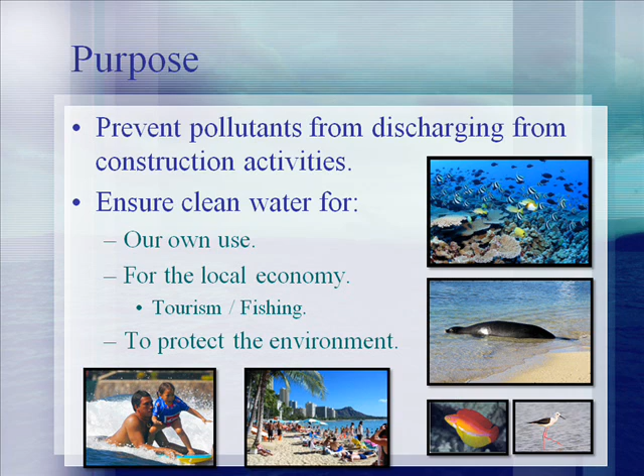All personnel involved in the construction process are expected to comply with the DOTA Environmental Construction Program. This includes the DOTA division and district engineers, as well as tenants who may initiate construction projects at the airport. Design consultants must be aware of the environmental requirements and incorporate the appropriate best management practices, or BMPs, into their design. Construction managers will ensure that BMPs are properly implemented at construction sites. Contractors will follow the BMP plans and ensure that their workers are trained in maintaining the site-specific BMPs.

Another requirement of the DOTA construction program is that every individual working at the airport must be aware of the DOTA environmental policy as put out by the Director of Transportation. The policy includes the acronym COP, in which the C stands for Continual Improvement, the O stands for Obey All Laws, and the P stands for Prevent Pollution. The full policy is available on the DOTA website. Remember that the DOTA would like for everyone to be a COP.

Stormwater runoff can carry pollutants from construction sites to adjacent storm drains or waterways. Once stormwater has entered the storm drain system, it is directed through pipes to the receiving water without any treatment. Therefore, it is vital to control potential sources of pollutants before they are impacted by stormwater runoff and possibly discharged to the storm drainage system.

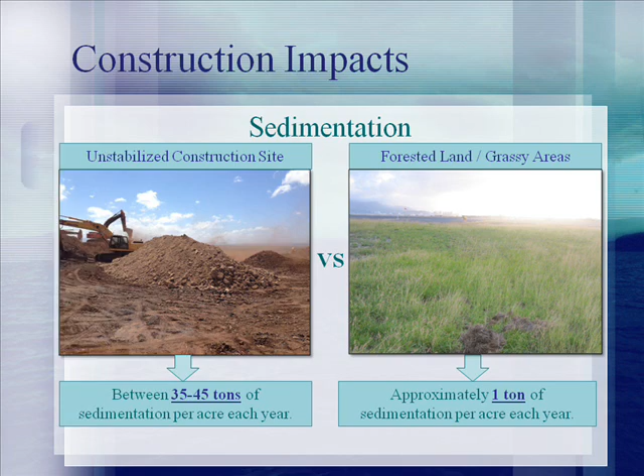Construction projects may have both short-term and long-term impacts on the environment. Specifically, construction sites usually result in the installation of increased impervious areas, such as paved parking lots, roads, and buildings. The more impervious areas there are, the less the stormwater can infiltrate into the ground. With decreased infiltration, there will be an increase in stormwater runoff and with it a higher potential for pollutants to be discharged into the storm drain system.

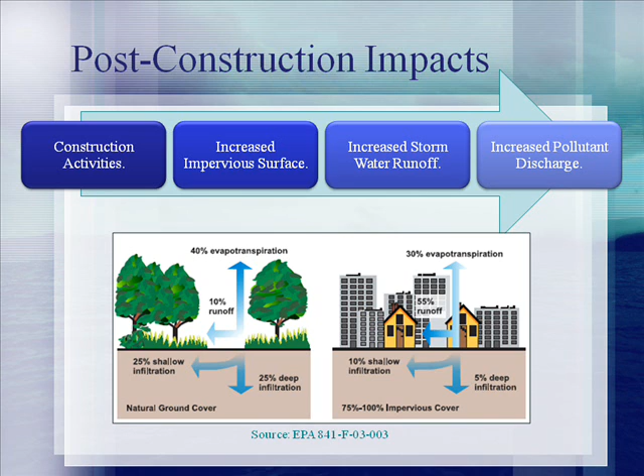Therefore, in order to mitigate this impact, the DOTA requires that construction projects also include permanent BMPs that will remain on site following construction to treat the stormwater runoff on a long-term basis.

There are several specific environmental regulations that govern construction activities. The DOTA has detailed specific requirements for construction sites on airport property within the SWMP Section C and D, which can be found online at the website shown. Additionally, the State of Hawaii Department of Health, or DOH, requires that National Pollutant Discharge Elimination System, or NPDES, permits be acquired in several circumstances. These circumstances may include any land disturbance over 1 acre, when dewatering must occur on site, or during hydrotesting.

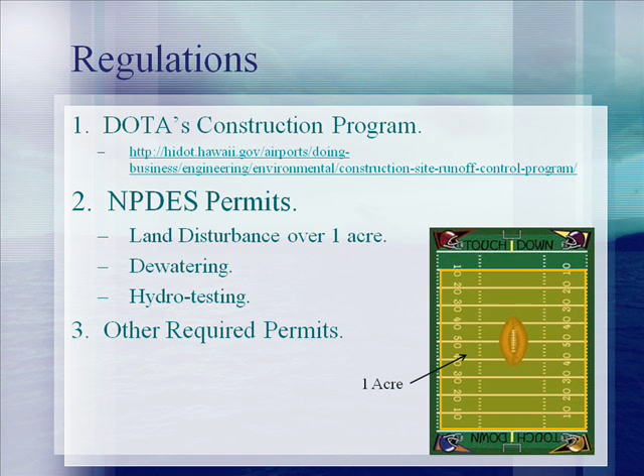Depending on the type of construction activity, there may be additional required permits. Specifically, if there must be a discharge or a new connection to the DOTA storm drain system, then a DOTA discharge permit must be obtained. Other permits may include the Army Corps of Engineers permits, the DOH 401 Water Quality Certification, County Special Management Area permits, and/or Federal Aviation Administration regulations.

The DOTA defines construction as any activity that disturbs land, which includes the penetration, turning, or moving of soil, or the resurfacing of pavement with exposure of the base course. This may include construction roads, staging areas, stockpiles, grading, grubbing, and demolition. If you are uncertain whether your activity meets the DOTA definition of construction, please assume that it does and submit your construction plans to the DOTA Environmental section for review. Their contact information is available at the end of this presentation.

The DOTA categorizes construction projects by project management. Some projects are planned and financed by the Department of Transportation, and other projects are initiated by tenants on airport property.

The type of project management used will help identify how to best provide environmental oversight. Projects may further be grouped by size, since projects that disturb an area greater than 1 acre have increased requirements for permitting. However, the DOTA must provide oversight for all projects, even if they are less than 1 acre.

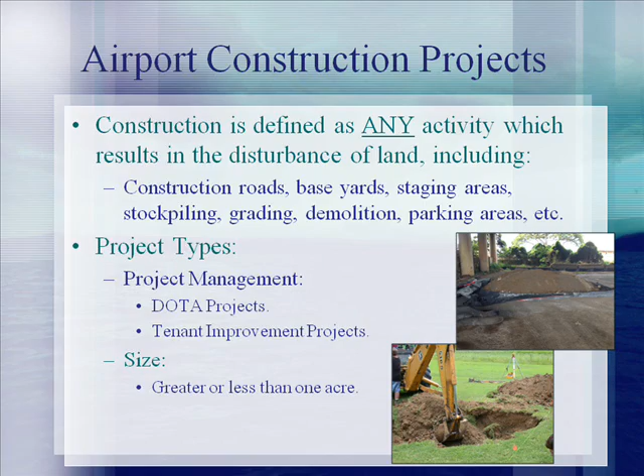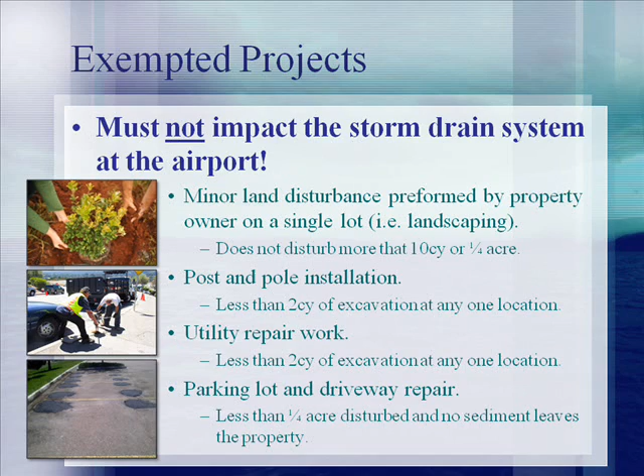The DOTA has evaluated some of the projects that occur at the airport and determined that the environmental impacts of certain types of projects are negligible and therefore may be exempted from the DOTA program. These projects must not impact the storm drain system in order to be considered exempted. Exempted projects include land disturbance on a single lot less than 1/4 of an acre, post or pole installation, utility repair work, and parking lot repairs.

Other projects that must comply with the DOTA process for environmental oversight are described in the Stormwater Management Program Plan, or SWMP, Sections C and D, which can be found online. A link will be provided on the last slide of this presentation.

BMPs must be implemented at construction sites. BMPs can include practices or procedures such as cleaning up a spill or picking up trash. BMPs can also include devices used to control pollutants, such as berms around the storm drains and stockpiles, secondary containment for chemical storage, and silt fence.

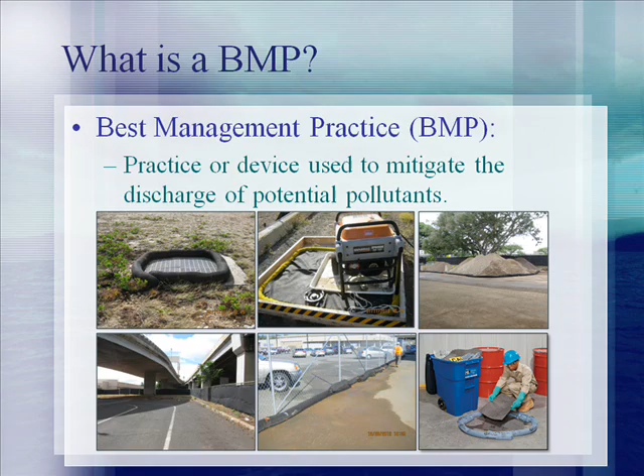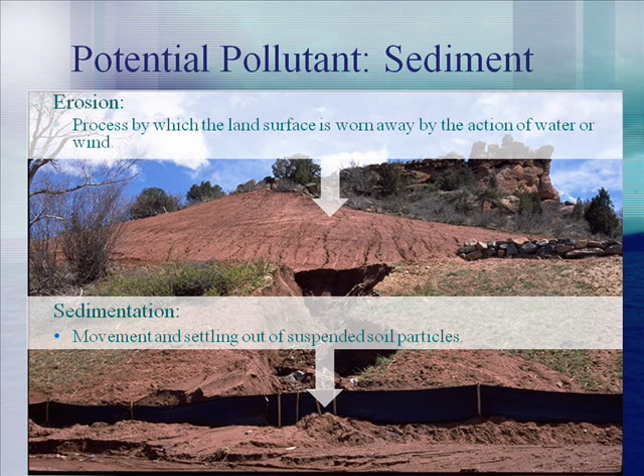The discharge of sediment is a common concern at construction sites. Therefore, the DOTA has included BMPs in the Stormwater Management Program Plan, found on the DOTA website, that address both erosion and sedimentation. Erosion results from the displacement of soil particles due to wind or water runoff. If erosion can be controlled on a construction site, then sedimentation, which is the movement and settling out of suspended soil particles off-site, will not be a concern.

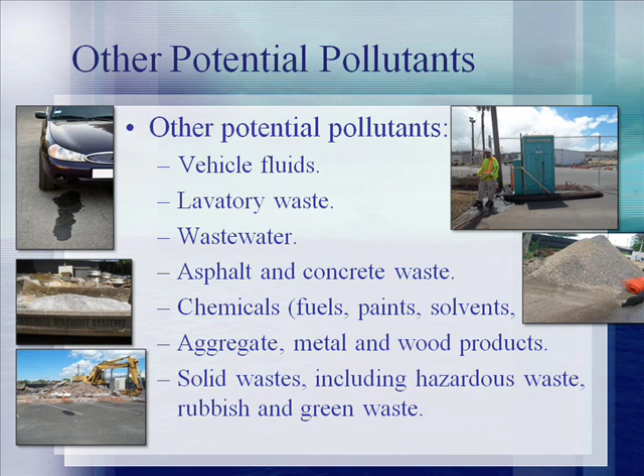Sediment is not the only potential pollutant from construction activities. Other common pollutants may include leaking vehicle fluids or spills from fueling activities, lavatory waste from portable restrooms, wastewater and concrete waste, or storage of chemicals on site such as paints and solvents. Further, aggregate stockpiles often include fine materials that can be carried away in stormwater runoff. Another concern is the generation of wastes, which need to be properly contained while on site and then disposed of.

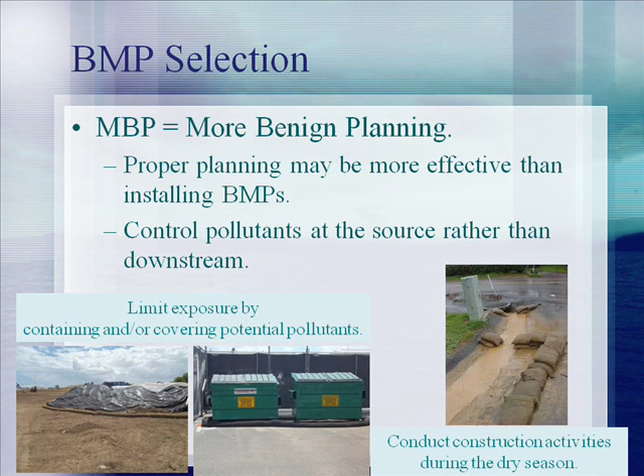When selecting BMPs, first begin with planning. Proper planning of a construction activity can often mitigate the pollutants that are generated. Project managers should consider the construction schedule, attempt to conduct ground disturbing activities during the dry season, or phase construction so that segments of the site may be stabilized prior to disturbing the next segment. Additionally, project managers should attempt to isolate potential pollutants by placing them indoors, covering, or otherwise containing them. Attempts should be made to control pollutants at their source, since removing pollutants downstream is much more difficult.

For the next step in this process, the designer should identify potential pollutants that may be generated at the site from start to finish. This may include looking at proper management of demolition wastes, controlling erosion during ground disturbance, the management of concrete waste from pouring the foundation, proper cleaning of painting equipment, and the use of pesticides or herbicides on installed landscaping.

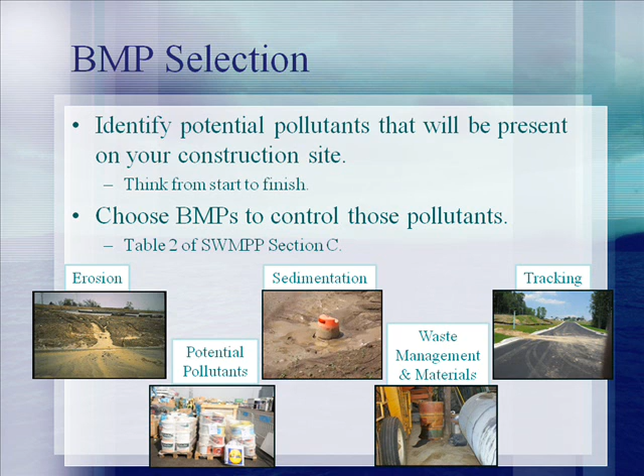Appendix A lists various BMPs that may be applied to the construction site. These have been divided into several categories: erosion control, sediment control, tracking control, other potential pollutants, and waste management. These BMPs are included as a framework. However, designers and contractors may implement other BMPs not listed here with approval from the DOTA Environmental section.

Every construction project on the airport must implement some type of BMP in order to control potential pollutants generated by the activity. These BMPs must be documented in a site plan that includes a site map. Note that BMPs may be updated at any time during construction as long as the changes are noted in the plans and initialed by the contractor.

The selected BMPs must be installed prior to any construction work on the site, including demolition. Once installed, the BMPs must be maintained throughout the course of the work until the soil has been stabilized.

Also think about unique challenges that may be posed by your construction site and be creative. Overall, the DOTA wants to prevent pollutants from entering the state's receiving waters, and therefore the DOTA is open to any creative solutions that designers and contractors can devise.

Designers should consider all aspects of a project and consider alternatives to certain applications, such as refraining from the use of herbicides or fertilizers during the installation or removal of landscaping. BMPs for the application of those chemicals are described in more detail in the SWMPP Section E.

In general, applicators should ensure that they are not spraying near a surface water body or on a steep slope. The forecast should be consulted to determine whether rain is expected that day. The wind speed should be checked in an effort to ensure that spray will only be applied where it is intended. Also of importance is a requirement that applicators keep a log of their usage of these chemicals and report it to the DOTA Environmental Unit at the end of the year.

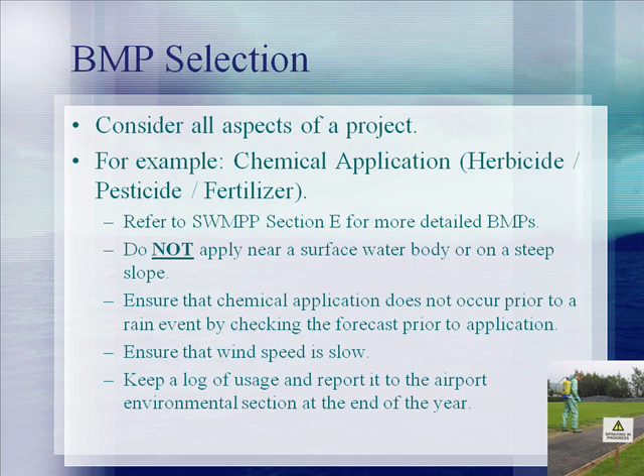In addition to BMPs that should be applied during construction, the DOTA requires the installation of permanent or post-construction BMPs. Permanent BMPs are vital because they will continue to address any potential pollutants long after a project has been constructed. For example, if a construction project is for a parking lot, consider adding a green parking BMP such as porous pavers or a central grassy swale to provide filtration for runoff in paved areas.

This will reduce the quantity of runoff and will also assist with reduced pollutant loads, such as oil drips from parked vehicles. Exemptions to the requirement for permanent or post-construction BMPs include sites disturbing less than 1 contiguous acre of land, linear utilities, and projects that will not discharge to any water of the United States. All other projects must select permanent BMPs and include them in the project design. The selected BMPs should be documented in the design review checklist.

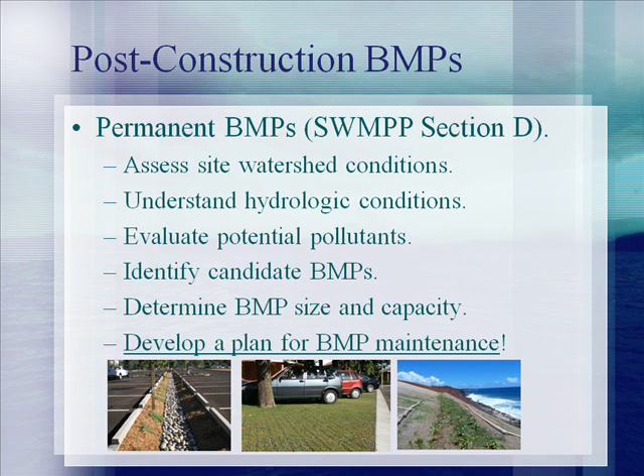Permanent BMPs are discussed in further detail within SWMPP Section D. Various factors should be considered when selecting a permanent BMP, including watershed and hydrologic conditions, as well as potential pollutants that may be generated. The designer should select a candidate BMP and size it appropriately to handle the runoff from the site. Most importantly, a plan for continued maintenance must be drafted, and in the case of tenant projects, a continued maintenance plan must be signed by the tenant owner.

A retrofit feasibility study was conducted for the Honolulu International Airport to evaluate completed areas of the airport and the potential to alter or insert a permanent BMP. The study includes a list of 10 hotspots to be addressed as soon as possible and 24 proposed retrofits that are ranked in order of priority. The study is available on the DOTA website.

An example of hotspots included in the report are the 2 triturators at Gate 6 and Gate 34. The triturators are locations where aircraft lavatory waste may be disposed into the sanitary sewer. The current design allows for the discharge of wastes to flow from the triturator to nearby storm drains if a discharge is not properly aligned over the pit. These illegal discharges have been noted by the Department of Health and Environmental Protection Agency on previous environmental audits. Therefore, retrofit options have been proposed to contain the triturators with perimeter curbing with a trench drain at the driveway opening, which would connect back to the triturator unit. Therefore, any spills in this area would be contained.

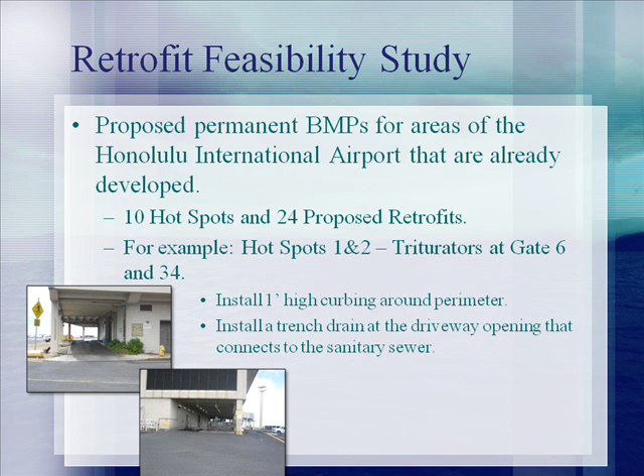Other hotspots and retrofits that were identified in the retrofit feasibility study should be evaluated when there is a new project at the airport. DOTA engineers may notify the environmental unit of this evaluation via email.

The DOTA has compiled a list of preferred permanent BMPs that should be implemented where possible for a project. The list is available on the DOTA website and focuses on 2 main goals. The first goal is to retain as much stormwater on a project site as possible. The second goal is to install a treatment system to remove pollutants from the stormwater that is discharged from a project site.

Many of the treatment BMPs are available through several different manufacturers. The maintenance section should be consulted prior to product selection so that continuing maintenance requirements can be met with standard equipment.

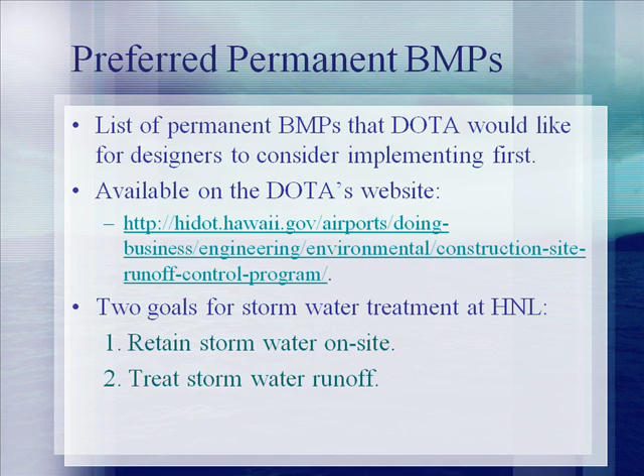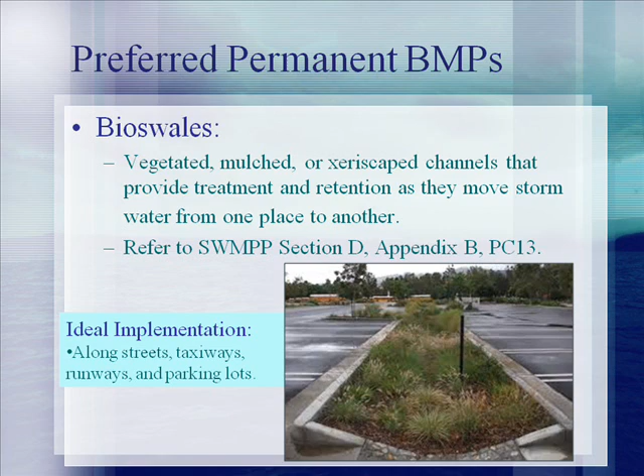Bioswales meet the objective of both retaining stormwater on-site and providing treatment. A bioswale consists of a channel where stormwater from a site would be directed and permitted to infiltrate into the ground, thereby reducing the quantity of stormwater discharge. Additionally, vegetation in these channels can be effective at removing quantities of pollutants that may be present in the discharge. Bioswales are ideally placed along streets, runways, taxiways, and parking lots where a significant amount of water needs to be drained from a paved area and can also support vegetation growth.

Underground detention systems are designed to drain an impervious surface area and direct it to underground compartments where the water is permitted to infiltrate and recharge the groundwater. This BMP is beneficial to use at the airport because it does not occupy space that may be needed for operational activities and also does not promote habitat for wildlife, such as birds, which are a safety concern for aircraft.

It is often a good idea to include a pre-treatment device with the underground detention system to remove trash and other large debris. Also, ensure that infiltration rates are examined in the potential construction areas to ensure that the BMP will be able to drain the expected runoff.

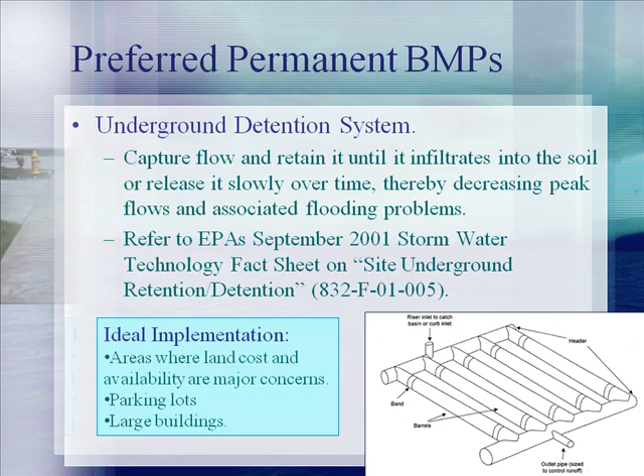Another BMP designed to retain stormwater on site is pervious pavement. This BMP is beneficial in areas where impervious pavement is normally installed, such as parking lots. Pervious pavement is designed to perform the same function that normal pavement does, but also allows the stormwater to infiltrate into the groundwater.

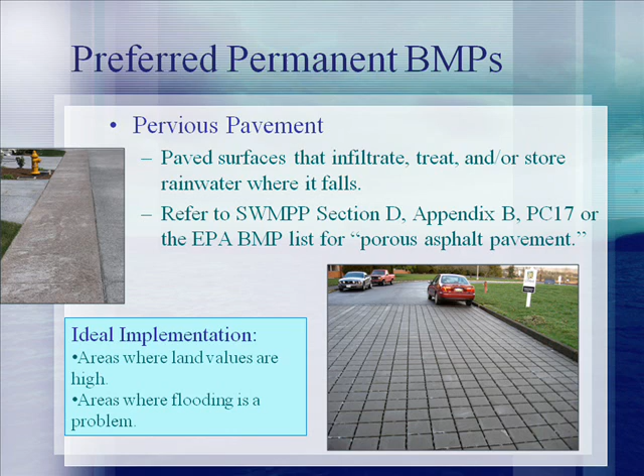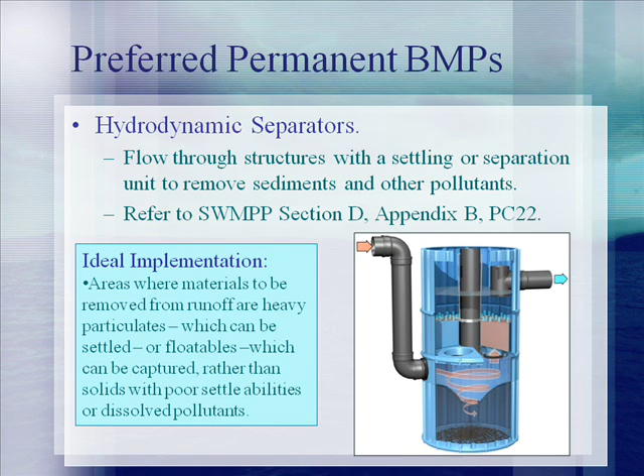Several hydrodynamic separators have been included in projects at Hawaii airports and are designed to treat stormwater runoff as it leaves the site. Specifically, as the discharge flows through the system, it allows for solids to settle out or float to the top and cleaner water to be discharged to the receiving water. These work well in areas where solid waste is expected, such as public areas, loading docks, gates, and landscaped areas.

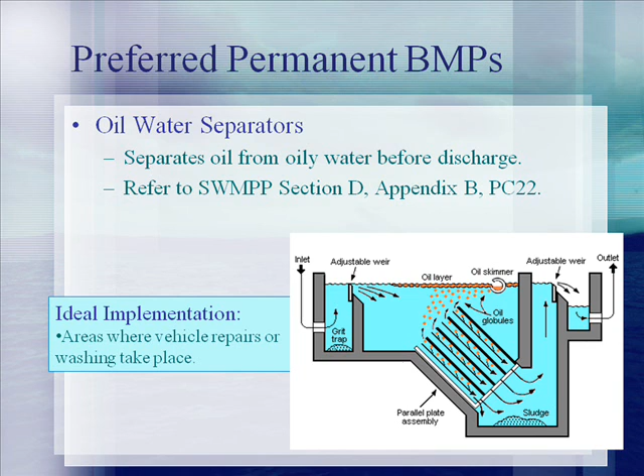Oil water separators are another option for stormwater treatment and have been implemented at several state airports. In contrast to the hydrodynamic separators, oil water separators are geared particularly towards the removal of petroleum products. This is beneficial in areas of the airport where maintenance or fueling operations are expected to occur, such as the gates and hard stands.

Storm drain inserts can either be temporary or permanent. Temporary storm drain inserts, like filter fabric or berms, are only in place during construction. However, there are several manufacturers that have developed permanent storm drain inserts that can be included in catch basins to remove debris from the stormwater runoff. Durability and maintenance concerns should be evaluated in detail prior to selecting this BMP.

For the Honolulu International Airport, storm drains have been ranked based on the amount of debris that has been removed from the catch basin. The highest ranked drains were included in the Retrofit Feasibility study and should be evaluated for the inclusion of storm drain inserts.

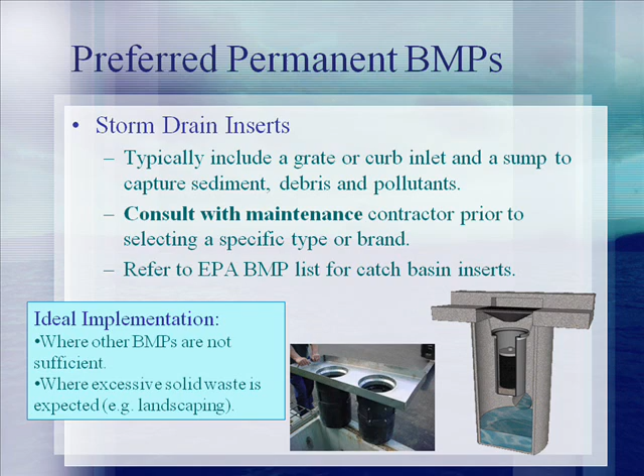Once the appropriate temporary and permanent BMPs have been selected, designers should compile site plans and complete the required paperwork. The DOTA environmental section is required to review all construction projects at the airport, regardless of size. Therefore, two forms have been created for designers to complete that describe a project and the BMPs that will be implemented. For sites that are less than 1 acre, the form from SWMPP Section C, Appendix F, should be completed.

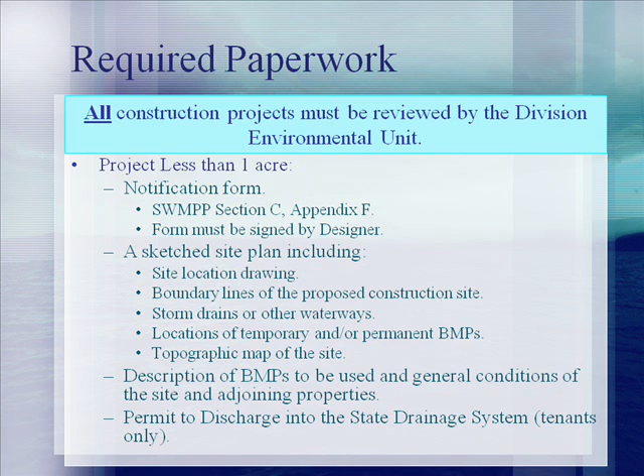The form should include a site map with project location, storm drainage features, and BMPs. In addition, for tenant projects that will be discharging to the storm drainage system, a permit to discharge must be obtained. The form for that permit is available in SWMPP Section C, Appendix E, and must be approved by the DOTA Environmental Section upon approval of plan review.

For sites greater than 1 acre, the Design Review Checklist is located in SWMPP Section C, Appendix C, and can also be found on the DOTA's website under Useful Documents. In addition to the checklist, the designer must also include site plans with both temporary and permanent BMPs, the project location, schedule, contacts, and applicable permits.

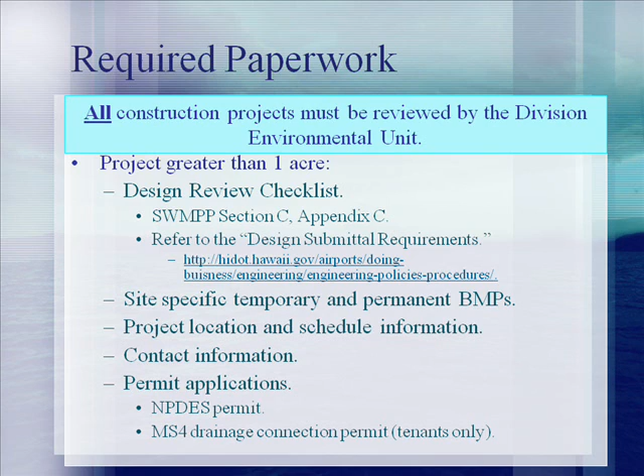These permits will include the NPDES coverage for construction activities from the Department of Health, the permit to discharge to the storm drainage system from DOTA for tenants, and any other applicable permits. Often during the time of plan review, the final permits may not have been issued. Therefore, the designers may submit the permit applications with their plan review paperwork. Contractors must have final permits available for review during the initial inspection.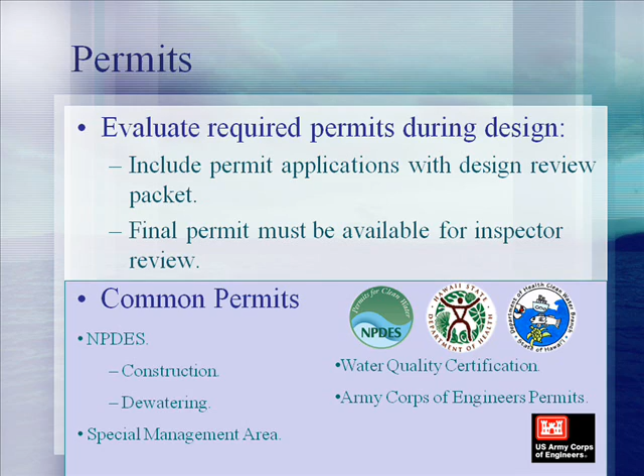In addition to those previously discussed, other permits that may apply to construction sites include NPDES for dewatering or hydrotesting, Special Management Use Area permit from the county, or Army Corps of Engineers permits. Designers should evaluate which permits are needed and include those with plan review documentation that is submitted to the DOTA Environmental Unit.

SWMPP Section C was recently updated and is available on the DOTA's website. In particular, a clarification was added that the storm drain connection or discharge permit from the DOTA is only required for tenant improvement projects. Additionally, DOTA has required that storm drainage features be included on site maps. The storm drainage features at the Honolulu International Airport are available at the website listed, and other airports are available upon request from the environmental section.

A major part of the DOTA environmental construction program is to ensure that projects are reviewed prior to their initiation. Project managers should note that prior to finalizing construction designs, the environmental unit should be consulted.

This is most easily accomplished by extending an invitation to a pre-design meeting. This will allow the DOTA environmental unit to identify areas where temporary and permanent BMPs may be implemented while there is still time and resources to make any necessary changes.

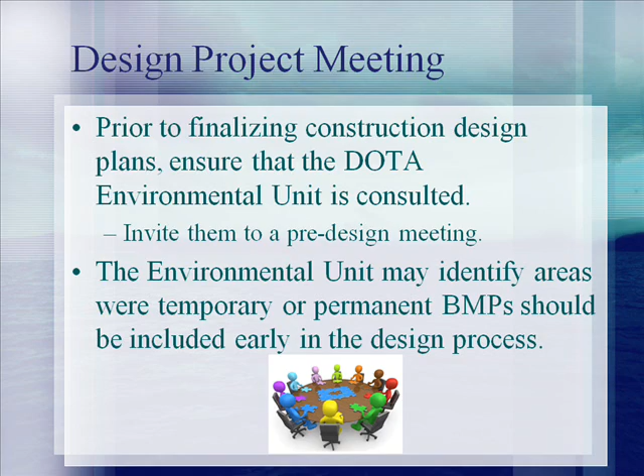Once designers have compiled the appropriate paperwork, the DOTA engineers will route the plans through the environmental section for review. This process may be repeated if the reviewer has comments that must be addressed prior to approval. Common reasons that construction plans have not received approval include that all the necessary paperwork have not been included, or that the described BMPs were not adequate for the activities to be conducted.

Once approval has been provided, the DOTA project manager will provide the first NTP.

The following slides provide additional information about what to expect from construction site inspections and potential enforcement actions that may result from environmental violations. A single construction site will have several different types of inspections. These are conducted to ensure that situations which may result in the discharge of pollutants are promptly identified and corrected prior to a release or a fine from a regulatory agency. These inspections are a beneficial tool to ensure compliance for both the contractor and the DOTA.

Several different inspectors are involved in the program, including the contractor, the construction manager or CM, and a third-party inspector, such as the DOTA environmental section and their consultants. As an update to SWMPP Section C, the responsibilities of these individuals have been more clearly defined.

The contractor has the overall responsibility to ensure that their activities are not impacting the environment. In particular, this should be accomplished by installing BMPs according to their plan. This should be accomplished during the period of the first notice to proceed. Contractors are not allowed to proceed with any other work until an initial inspection has been conducted on the site.

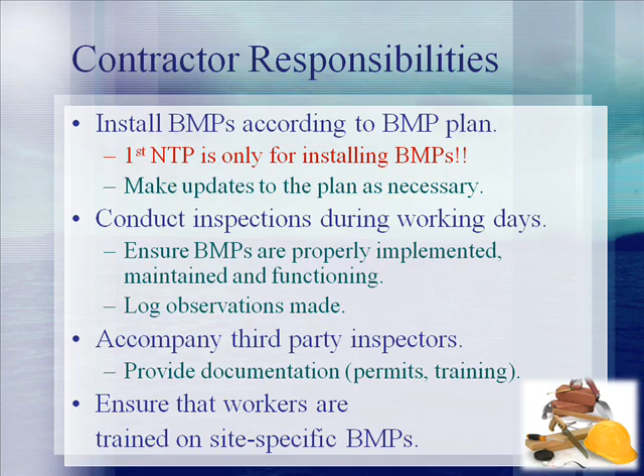Contractors must also provide training to employees that are working on the site. These workers must be trained on site-specific BMPs, and those training records will be evaluated during inspections. Please note that regulatory agencies can ask any site workers questions regarding environmental compliance, and it is vital that at a minimum, employees should understand how their actions could impact the environment.

Construction managers, or CMs, are retained to oversee DOTA projects. CMs also conduct inspections for BMPs to assist in ensuring compliance with environmental regulations. Weekly, a written CM inspection report should be submitted to the project manager and environmental unit. The inspection report format is available for download on the airport environmental website.

Please note that as a recent revision to SWMPP Section C, inspections are no longer required following a rain event. The contractor will be conducting a daily inspection to address any maintenance concerns that may arise from significant storms.

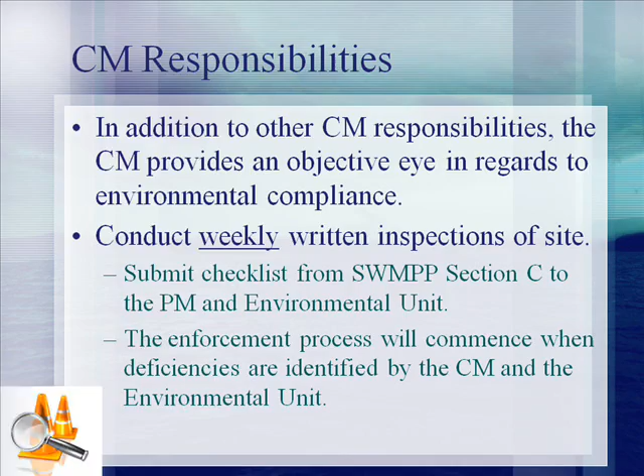Third-party inspectors will conduct the initial site inspections following the first notice to proceed, or NTP. Typically, the inspector will contact the project manager to determine when the contractor is ready for inspection, usually within 30 days of the first NTP.

The project manager will issue the second NTP to start construction activities once any deficiencies identified by the third-party inspection have been corrected. Throughout the construction project, the third-party inspector will continue inspections.

These inspections will be set on a monthly schedule unless the inspector determines that due to previous deficiencies, more frequent inspections should be conducted. The third-party inspector will also conduct a final inspection at the site to verify that all disturbed areas of soil are properly stabilized prior to the removal of temporary BMPs. The final inspection also serves as the initial inspection for any post-construction BMPs that may be installed on the site.

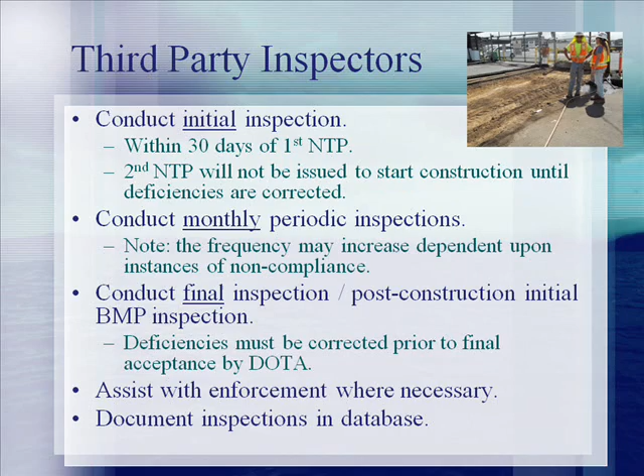All the inspections will be documented on the inspection form from SWMPP Section C, Appendix D, and documented in the DOTA database. In addition to third-party inspectors, the project manager and contractors should be aware that regulators such as the Department of Health, or DOH, and the Environmental Protection Agency, or EPA, can conduct inspections of the site.

Although inspections are usually scheduled with the project manager, CM, and contractor, inspectors such as the DOH and the EPA can choose to show up to a site unannounced. Typically for those sites outside of the secured areas, regulators will arrive unannounced. Therefore, it is important to be prepared at any time.

Inspectors will report to the contractor's office when they arrive on site and will request to review all the applicable paperwork. This may include the latest update to the BMP plan, permits, employee training records, and contractor self-inspections. The BMP plan in particular will be used to evaluate the remainder of the construction site. Therefore, it is vital that this document is kept up to date.

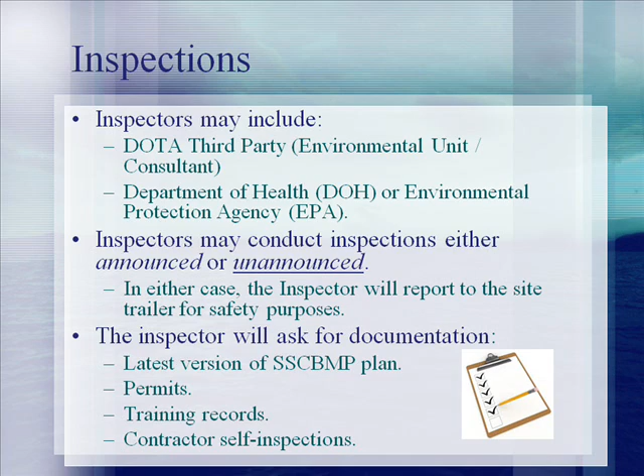Overall, an inspector is looking to ensure that all the BMPs in the site plan have been implemented and are properly maintained. They will look at places where pollutants may be discharged from the site, including storm drains and construction entrances, to determine whether they are properly controlled.

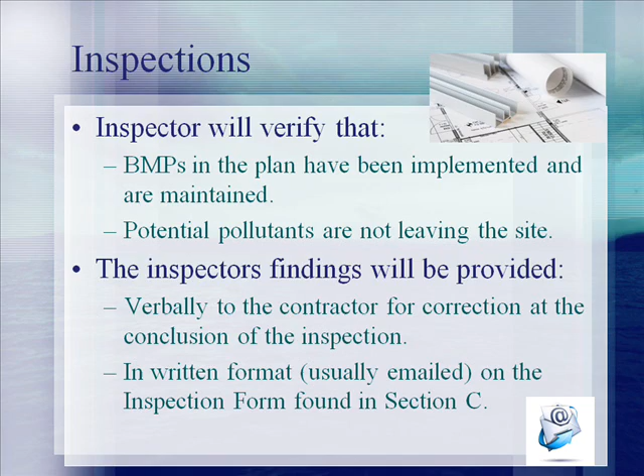Third-party inspection findings are always communicated verbally to the contractor at the end of the inspection so corrections may be made immediately. Following the final conference, a written copy of the inspection findings will be provided via email. Contractors should respond with photos of corrections made or a plan for correction. The inspector will then set a time for re-inspection to ensure corrections are completed.

Presented here is a list of the most common deficiencies identified during third-party inspections. The following slides will describe the associated problem and present solutions for correction.

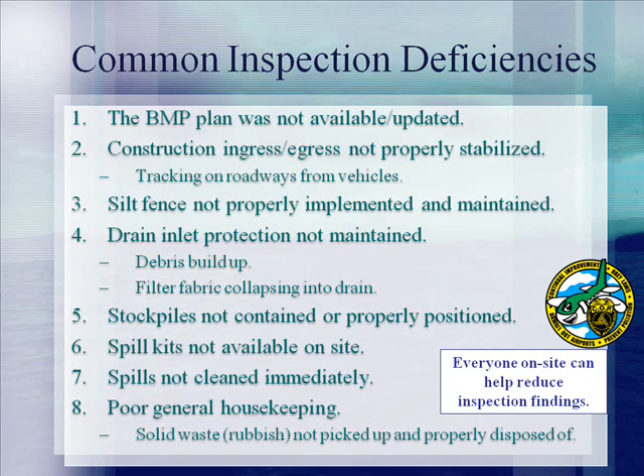It is important for everyone to be aware of the site-specific BMPs and the associated requirements for continued maintenance. Many times, employees' knowledge of the right thing to do has made the difference in determining site compliance. During inspections, sites have either not had the BMP plan available on site, or it was not updated.

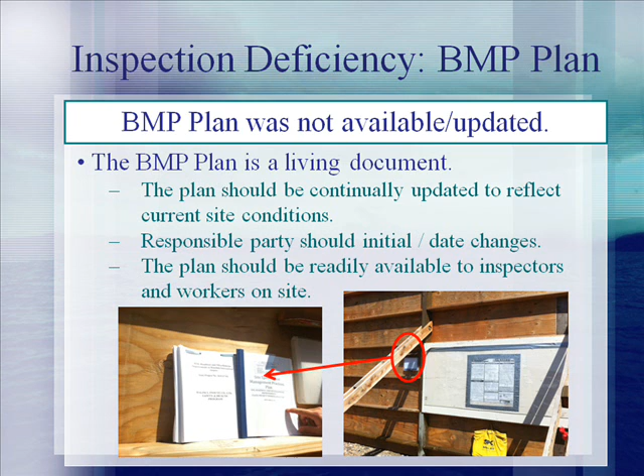The plan is the basis for how a regulator will evaluate the site. Therefore, it is vital to have the plan available and up to date so it is clear which BMPs should be present on the site. The construction site pictured here did not have a trailer on site in which to store the BMP plan. Instead, an installed plastic sleeve was used so it was available for workers and inspectors.

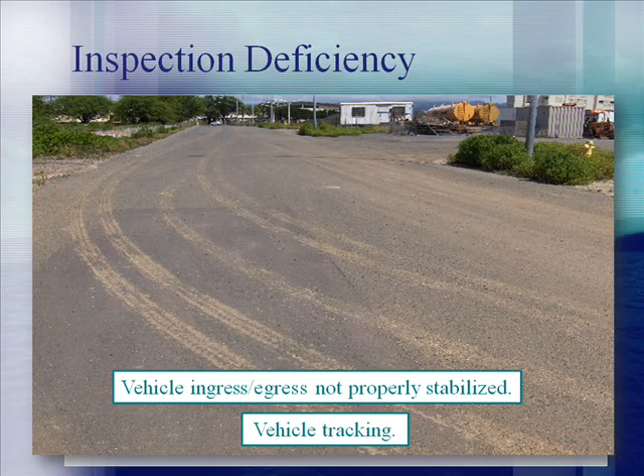Another common issue relates to the construction site entrance. The tracking of sediment onto the road is easily visible to both inspectors and the public. Therefore, it is vital that construction entrances have sufficient BMPs to remove sediment from vehicle tires prior to exiting onto the street. One way to prevent tracking is to install a stabilized construction entrance.

Specific details for stabilized construction entrances are included in SWMPP Section C, Appendix A. In general, the entrance should be a minimum of 50 by 30 feet and covered with 3 to 6 inch diameter aggregate. Maintenance may need to be conducted throughout the life of the project to remove accumulated sediment and keep the aggregate from settling.

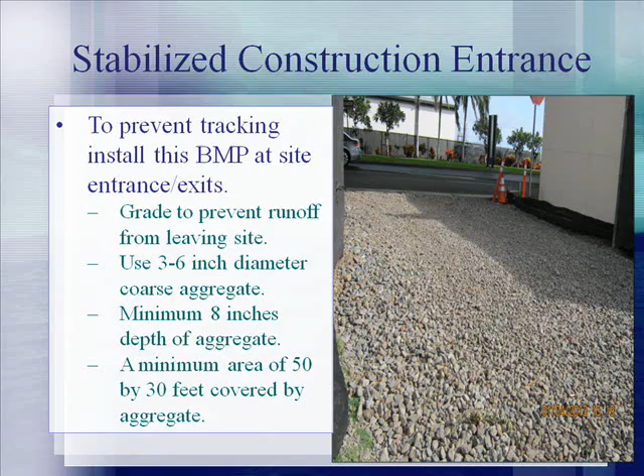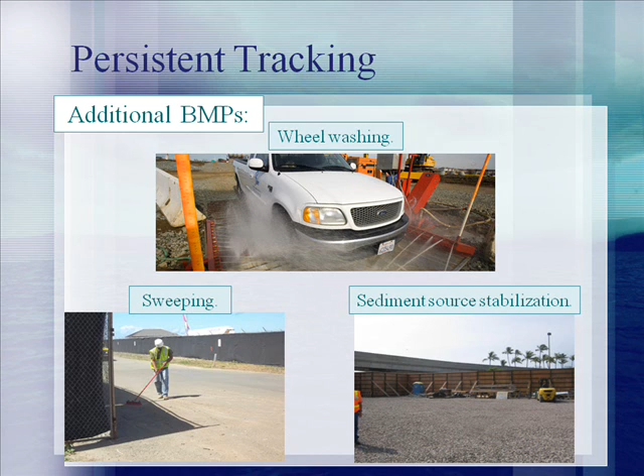If tracking persists, additional BMPs can be implemented, such as regular street sweeping, washing vehicle tires as long as the wash water is properly contained, and stabilizing the source of the sediment.

Silt fence can be used to control sediment throughout a construction site. However, it must be properly installed and maintained. When it is not maintained, sedimentation may be carried off-site and result in an illicit discharge.

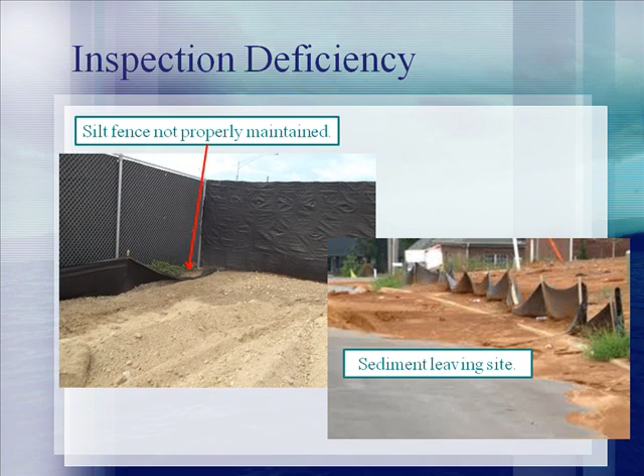Silt fence should be properly installed and maintained by setting the post on the downstream side of the fence every 6 to 8 feet. The fabric should be stretched tight and the fence should be backfilled approximately 6 inches to secure the bottom of the fence.

The goal of a silt fence is to hold the water back like a dam. There are other products, such as filter fabric, that will let the runoff pass through. However, the silt fence is designed to keep that water on site along with any associated pollutants.

To aid in achieving this goal, installation should include properly joining segments of silt fence. This can be accomplished either by twisting the two ends together or by overlapping them. Additionally, the ends of a silt fence should be placed in a J-hook pattern to prevent stormwater from flowing around the fence.

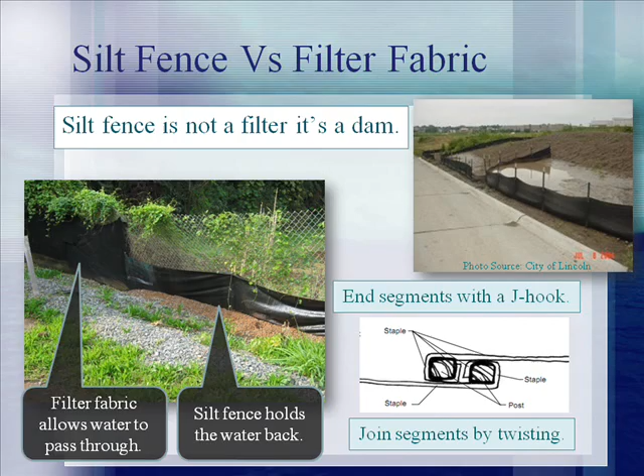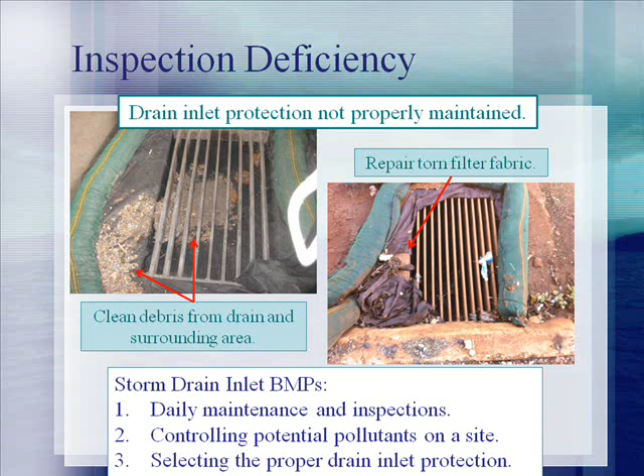Filter fabric can be used to protect storm drain inlets from potential pollutants. This should be used as a last line of defense, after properly containing potential pollutants at the source. A common finding during inspections is that the inlet filter fabric has not been maintained. Contractors should be conducting frequent inspections to ensure that torn filter fabric is replaced and accumulated debris is removed.

Stockpiles of aggregate material stored on the construction site must be properly contained. This practice should be implemented to prevent fine material from being carried away in stormwater runoff.

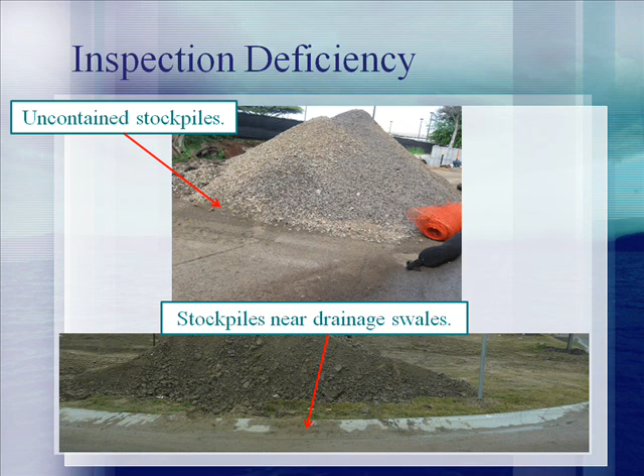Additionally, stockpiles should not be positioned near waterways such as drainage swales, storm drains, streams, or the ocean. By leaving some distance between the stockpiles and the waterways, the contractor will have a better chance of catching stray material that may be washed away during rain events.

There are several ways to contain aggregate material stored on site. The stockpile could be covered, vegetated, or surrounded by a BMP device. These devices may include berms, silt fence, jersey barriers, or even concrete masonry unit walls to effectively contain the stockpiled material.

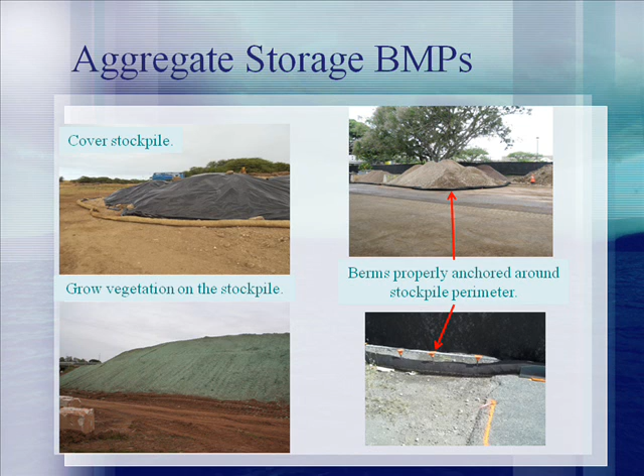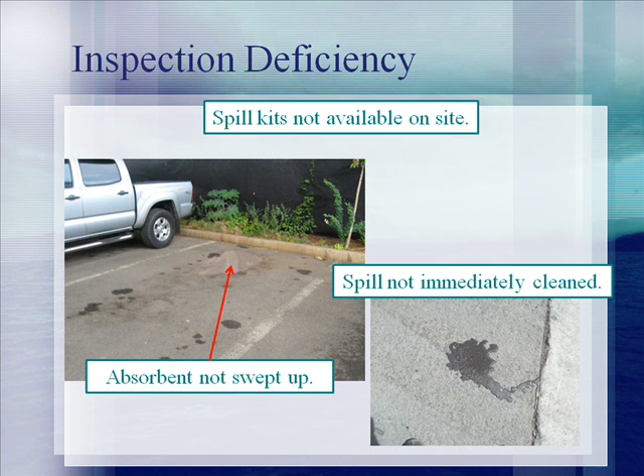Spills and vehicle leaks are a common source of pollutants on a construction site. Vehicles and equipment must be inspected regularly and leaks cleaned as soon as possible. It is important to have a spill kit on site so that cleanup materials are readily available to respond to these incidents. Another reminder is that spills are not completely cleaned up until the absorbent is removed and properly disposed of.

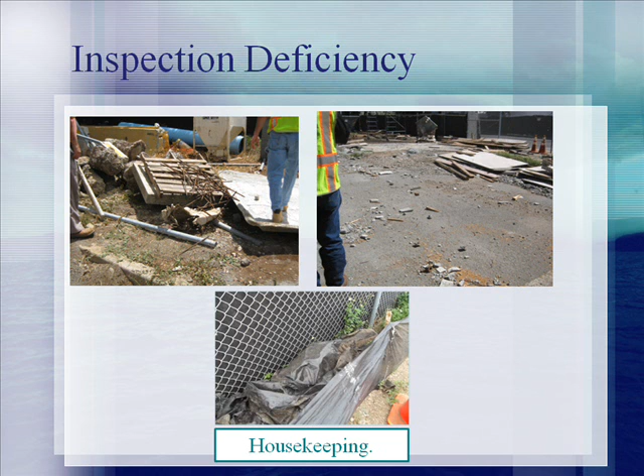Another common deficiency noted during inspections relates to good housekeeping BMPs. Trash and debris throughout the site can be picked up by the stormwater and discharged to the receiving water. Make it a regular practice at your site to clean up debris at the end of the day.

There are several other good housekeeping BMPs that can be commonly applied at the construction site. Frequent sweeping of paved areas aids in removing sediment and debris. Regularly maintaining BMPs is also important and could involve removing accumulated sediment or repairing broken berms. Solid waste containers should be covered to prevent stormwater from impacting the wastes, and waste should be removed from the site regularly. Contractors should be sure to separate waste that may be hazardous waste from the solid waste items and manage those appropriately.

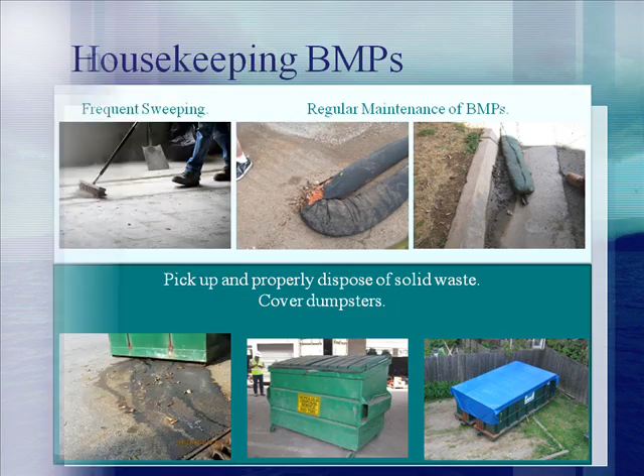Improper disposal of paint waste and painting equipment cleanout can introduce pollutants to the stormwater. When painting, ensure that a tarp or another device is used to catch any drips that may occur during the painting operation. When storing paints, place them within secondary containment, such as a spill pallet. Secondary containment is required for liquid materials and wet cell batteries.

When painting operations are complete, ensure that the equipment is cleaned properly. This will include scraping off the excess paint back into the paint can and washing the brush or other painting tools into a contained area such as a bucket. The bucket and remaining water-based paint can be allowed to dry, and the remaining debris should be disposed of as solid waste. Please note that if oil-based paint is utilized, it is considered a hazardous waste and therefore must be managed differently from water-based paint.

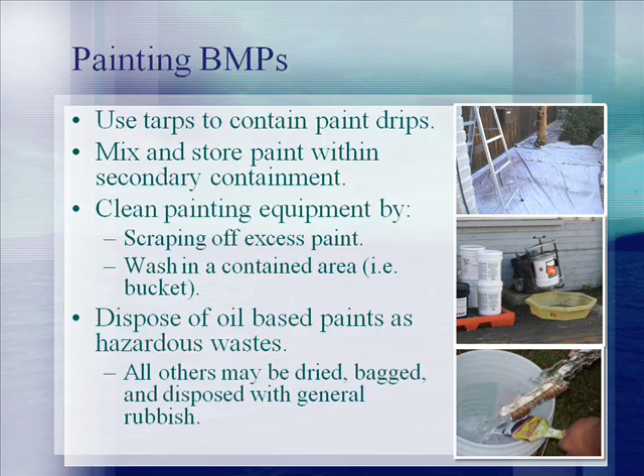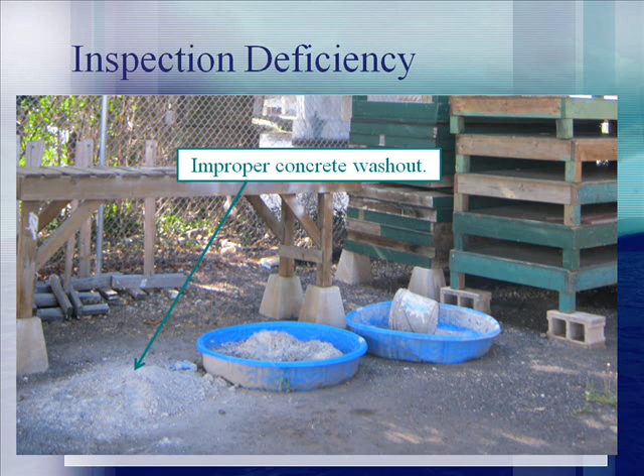The creation of concrete areas on a construction site often results in the need to wash out equipment involved in the laydown of the concrete material. The improper washout of this equipment can generate stormwater pollutants. The concrete residue is a fine material that can easily discharge into runoff, which can change the pH of the receiving water. It is important to ensure that all concrete washout is properly contained. This can be accomplished by designating a container on site and removing the debris once the water has evaporated. Additionally, a cover may need to be added to the washout when rain is forecasted to prevent the wastewater from overflowing the containment.

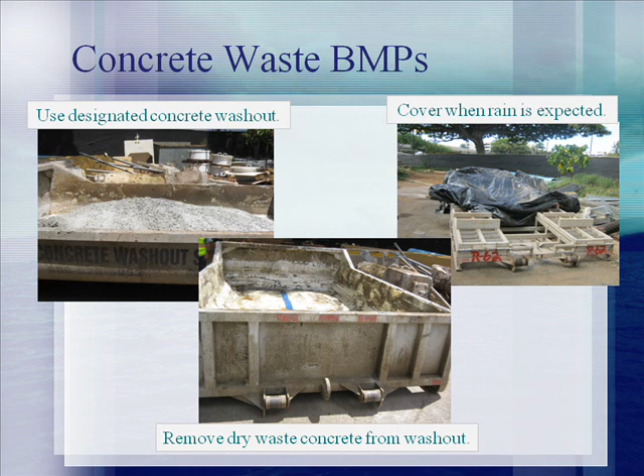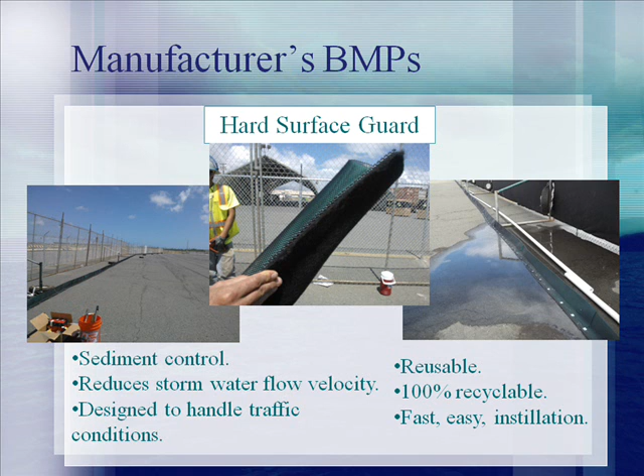There are many new types of BMPs that have been developed by manufacturers. The one pictured here is called a hard surface guard and may be nailed into the pavement to keep potential pollutants on site. It is effective at filtering sediment and oil from the discharge water and can be reused on various jobs.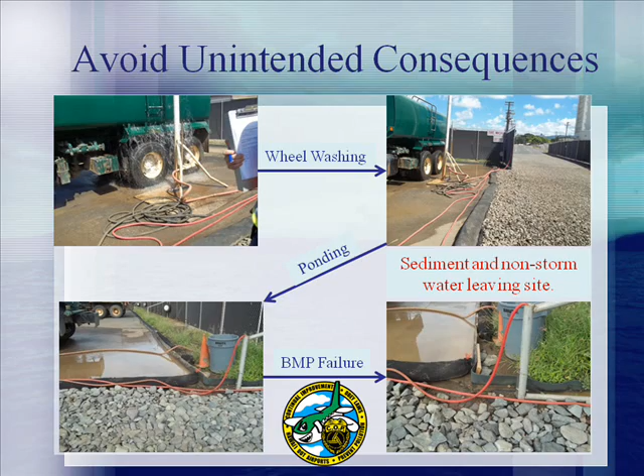Implemented BMPs can occasionally cause a discharge of pollutants that was not anticipated. In the instance pictured, a tire wash area generated excess wastewater that could not be controlled by the berm that was in place. In this case, the wash area was moved and additional aggregate was placed to increase the infiltration and stop the discharge. It is important to evaluate all implemented BMPs to determine whether they are effective at controlling potential pollutants and make changes where necessary.

Spill kits must be kept on site and properly stocked. Spill kits should include personal protective equipment, a plastic bag or other container for disposal, non-sparking tools such as a broom, and absorbent. The absorbent may be items such as berms, pads, or clay granules.

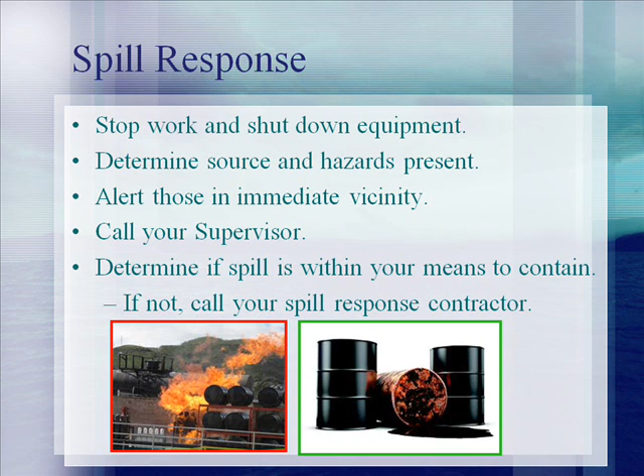When a spill or a leak does happen on the construction site, ensure that proper response measures are conducted. This includes stopping work and shutting down equipment. Then attempt to determine the source of the spill and alert others in the area to the hazards. Furthermore, the supervisor should be notified so that they can make the determination if the spill can be cleaned up with materials on site or if a spill response contractor may need to be retained. Note that it is the contractor's responsibility to either clean the spill or retain a spill response company.

If it is in your ability to respond, obtain the necessary items from the spill kit. Attempt to stop the source of the spill and contain the exterior of the spill area. Then apply absorbent to remove all spilled material. It should only take 10 to 15 minutes for the absorbent to work.

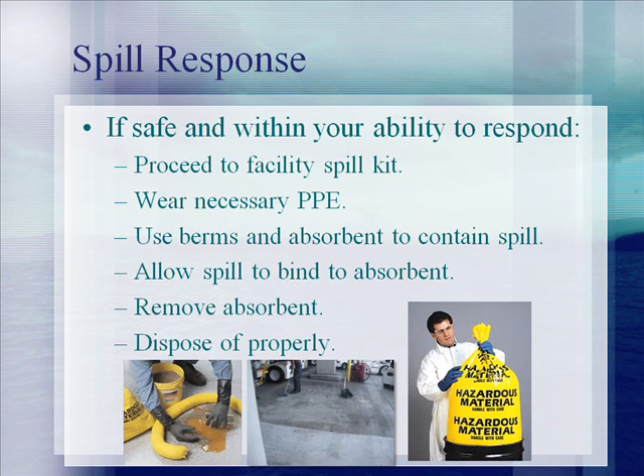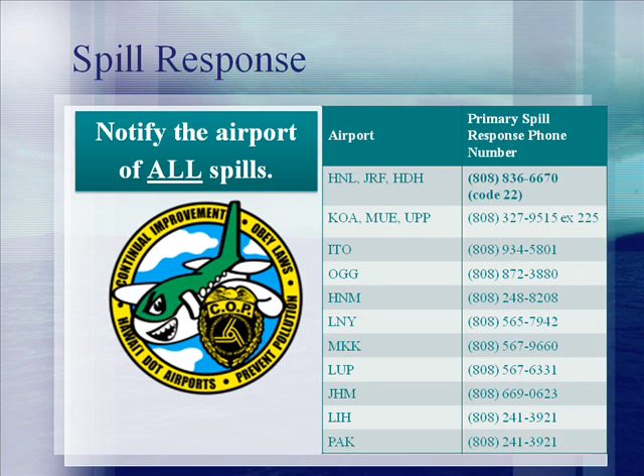Responders may need to work the absorbent into the spill using brooms, and then sweep and dispose of the absorbent material properly. All spills on the construction site must be reported to the airport personnel for record-keeping purposes. The phone numbers for reporting spills at each airport have been listed on this slide.

Depending on the severity of the spill, additional notifications may need to be made. If a petroleum spill occurs that is greater than 25 gallons, has not been cleaned up within 72 hours, or has entered a waterway, the agencies listed should be notified.

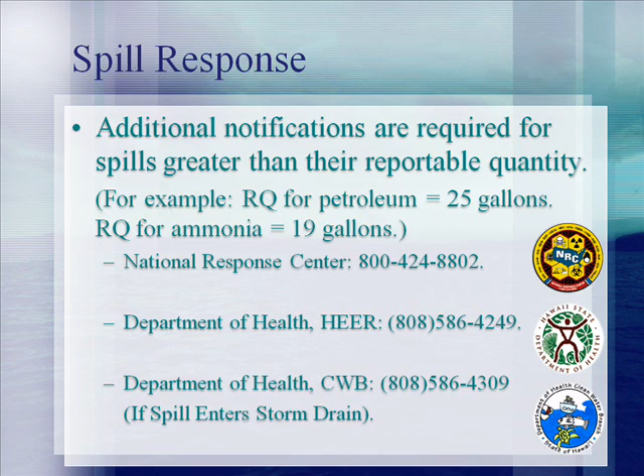Once the project has been finished, there will be a final inspection for the site that includes an initial inspection of the installed permanent BMPs.

The goal of the final inspection is to ensure that all disturbed soil has been stabilized and sources of potential pollutants have been removed. This may include actions such as growing vegetation or paving the area, removing fuel and other chemicals used during construction, removing dried concrete washout debris, and any other construction-related items.

Note that temporary BMPs should still be present during this final inspection and may not be removed until all deficiencies have been resolved. Please note that projects occurring in certain sections of the movement area may not use vegetation as a means of final stabilization due to concerns over bird flight hazards with aircraft. The means of final stabilization should have been discussed during the plan review phase.

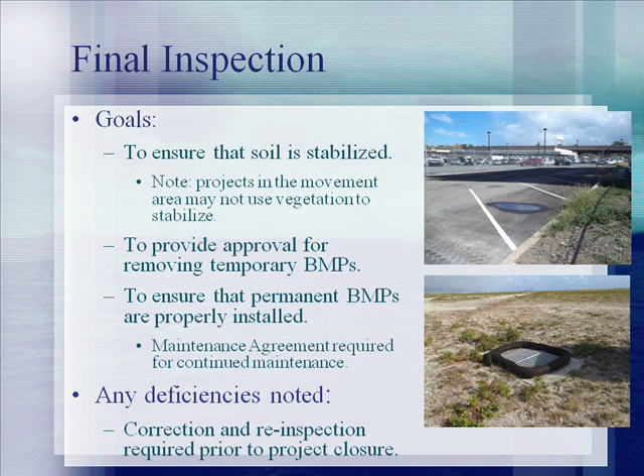The secondary goal of the final inspection is to ensure that designated post-construction BMPs have been installed. An operation and maintenance agreement should be provided that details the continued maintenance requirements for the permanent BMP.

Throughout the construction process, enforcement actions may be implemented where necessary to correct deficiencies identified. When deficiencies have been identified and enforcement becomes necessary, an inspector will verbally communicate their findings to the contractor to allow the contractor to begin correcting the items immediately.

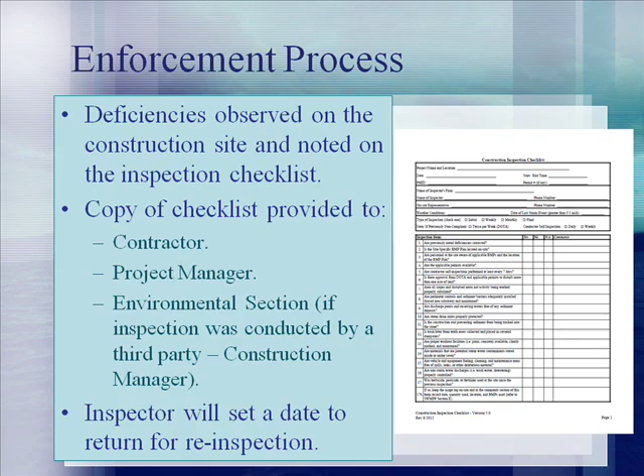Once the inspection report has been drafted, it will be sent to the contractor and the project manager. Additionally, the inspector will set a time period for reinspection of the site. If a violation continues after the reinspection, or an illicit discharge occurs, additional measures may be taken such as withholding payment for DOTA projects or issuing a stop work order for tenant projects.

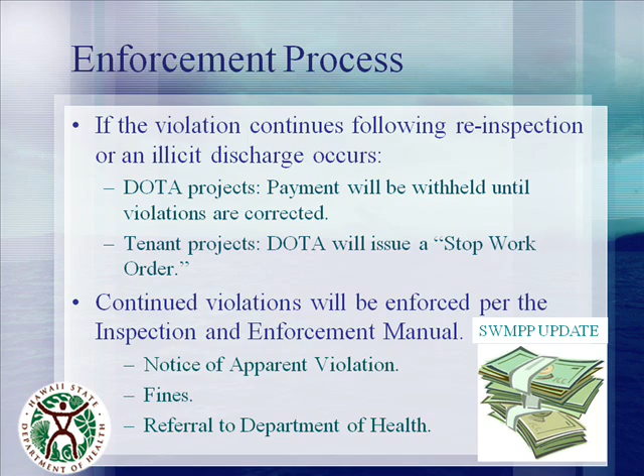Another change to the SWMPP is the enforcement process, which includes an escalating process that is outlined in the Inspection and Enforcement Manual. This may include the issuance of a notice of apparent violation, fines, and a referral of the case to the Department of Health.

Once a regulatory agency, such as the DOH, begins enforcement, there may be specific costs associated with each violation and compounded by each day the violation had occurred. The cost schedule shown on this slide may apply in varying amounts depending on the situation.

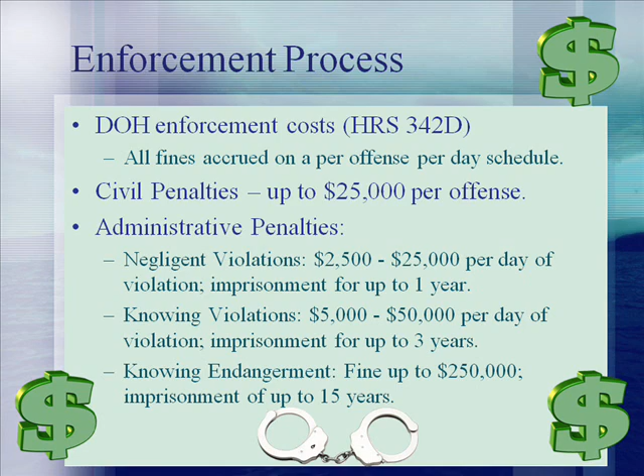However, in any case, this is a cost that all parties working on behalf of airport construction projects can avoid by following the program described here and in the SWMPP Section C and D.

Other updates to the SWMPP include a more descriptive training program. The training requirements are broken down into 3 different types.

The first is the DOTA-provided training, which is accomplished through viewing this presentation and retaining a training roster. This training roster will need to be presented during inspections and is geared towards project managers, construction managers, contractor managers, third-party inspectors, and tenant owners.

The second type of training is for contractor employees who will be working on the construction site. These employees must be familiar with the site-specific BMPs and spill response procedures. Training rosters must be presented to inspectors during site inspections as proof of their training on these topics.

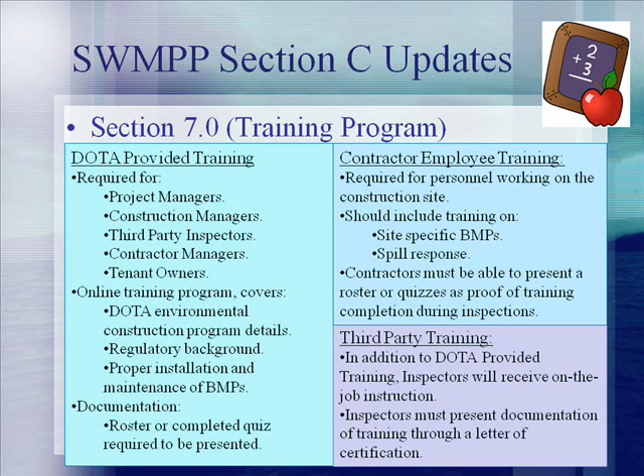Inspectors must receive on-the-job instruction in addition to the DOTA-provided training. Inspectors will work under a qualified inspector until determined through a letter of certification that they may inspect a site independently. Appendix A of the SWMPP Section C has been updated to reflect the changes that were documented in the City and County of Honolulu's BMP plan, as well as observations made during inspections.

These BMPs may be referenced when designers and contractors are selecting BMPs for their projects.

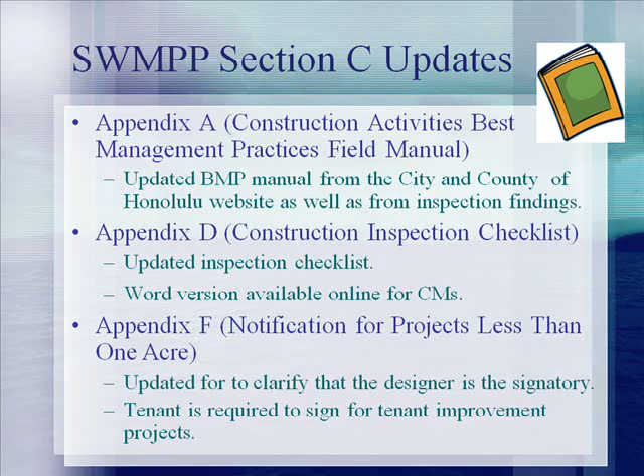Appendix D has an updated construction inspection checklist that inspectors and construction managers should use when documenting site inspections. Additionally, the DOTA has provided a Word version of the checklist for inspectors to use. The notification form for sites less than 1 acre has also been updated to clarify the signatory responsibilities.

The DOTA has instituted this environmental construction program as a part of the standard business practices at the airport and should be followed by all persons involved in construction.